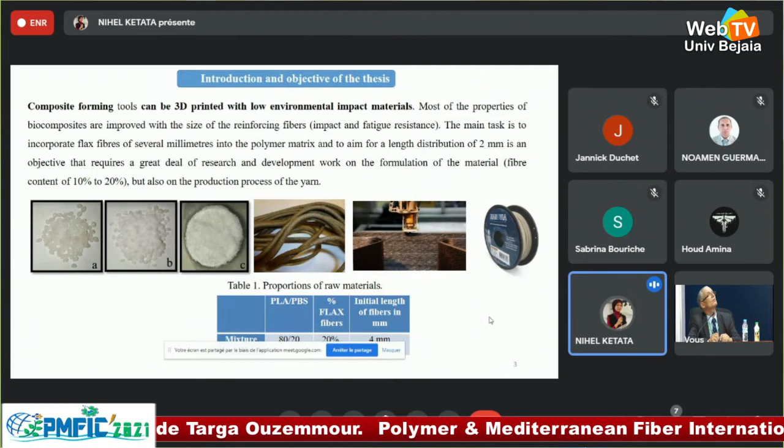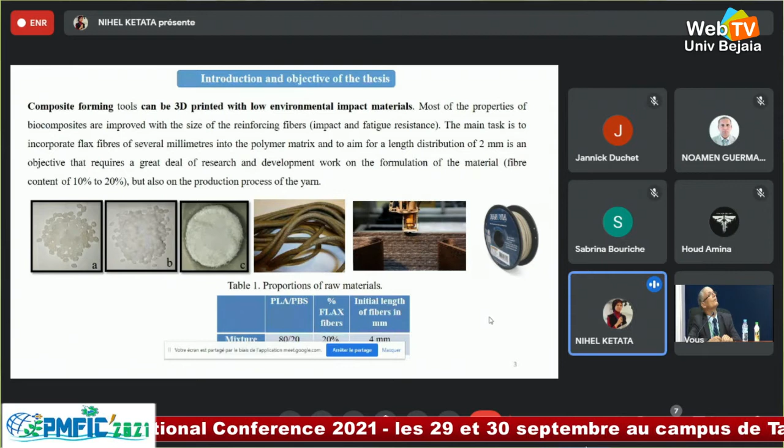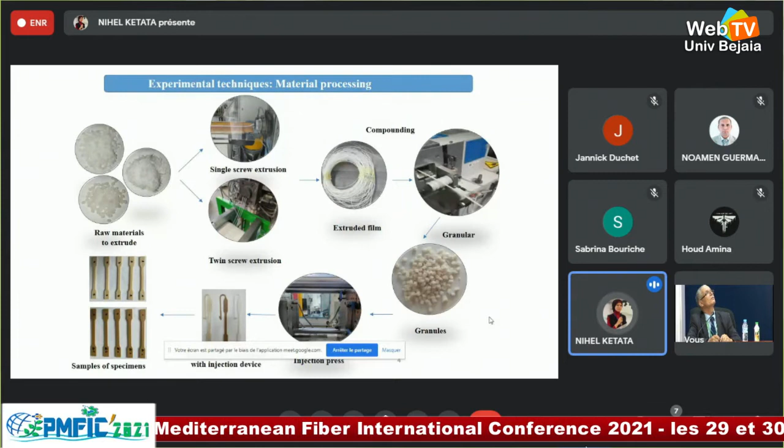So the main work is concentrated on 3D printing materials with low environmental impact using the FDM process. It is a biocomposite from a mixture of 20% PBS and 80% PLA reinforced with about 20% flax fibers. So we manufactured the test specimens using two extrusion methods to compare them in terms of mechanical results and, most importantly, in terms of fiber distribution results.

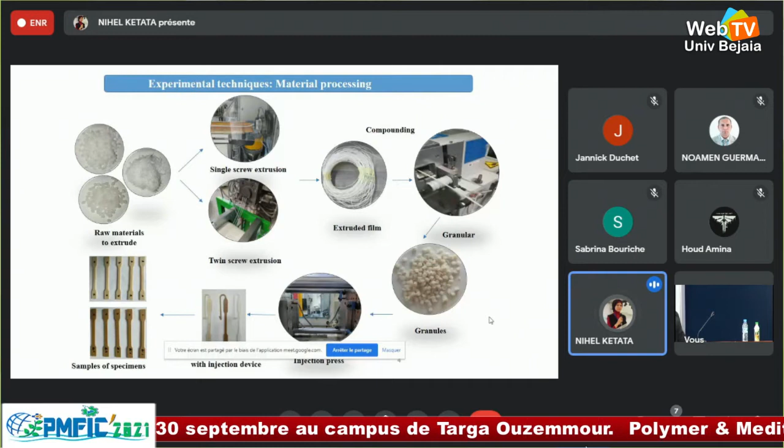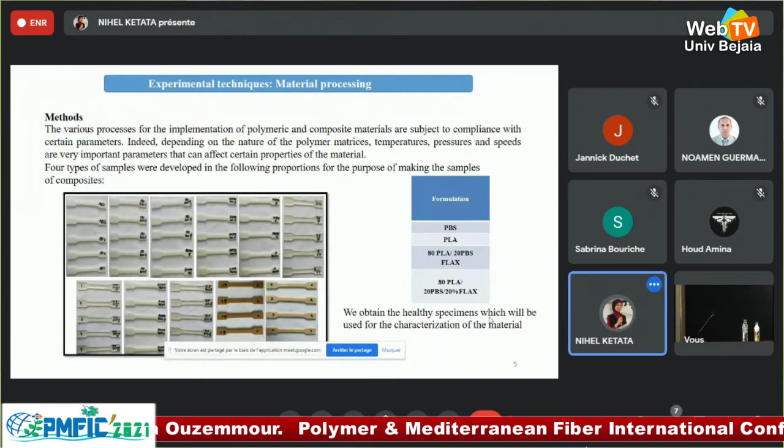So we use the single screw and the twin screw extrusion methods to obtain the extruded films. Then we granulate them to inject the test specimens and finally obtain the specimens which will be used for the characterization of the material. So we made four types of formulation. We test the PBS version, the PLA version, 80% PLA with 20% PBS for the matrix, and 80% PLA with 20% PBS reinforced with 20% flax fibers.

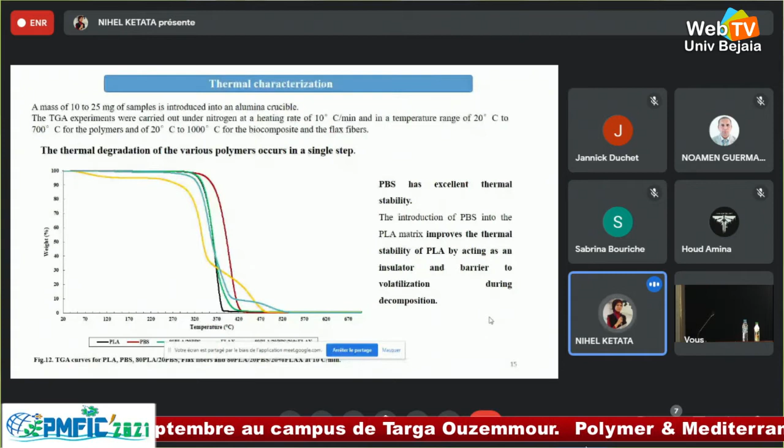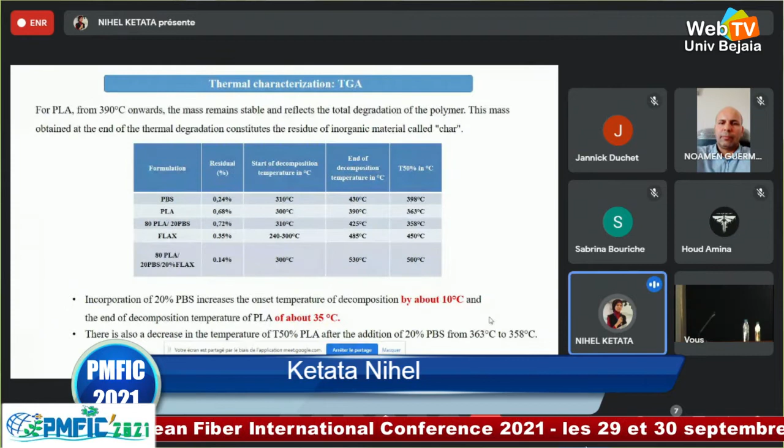Moving now to the thermal characterization. For the four formulations and the flax fiber, the results show that PBS had excellent thermal stability. Also, the introduction of PBS into the PLA matrix improved the thermal stability of the mixture compared to PLA only. Incorporation of 20% of PBS increased the onset temperature of decomposition by about 10°C and the end of decomposition temperature of PLA by about 35°C.

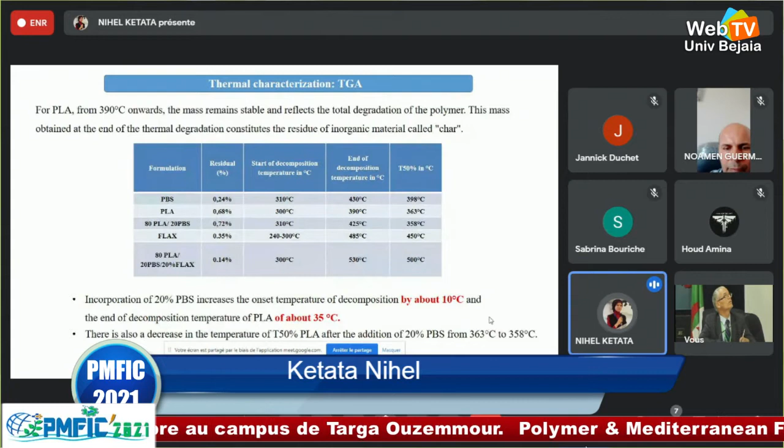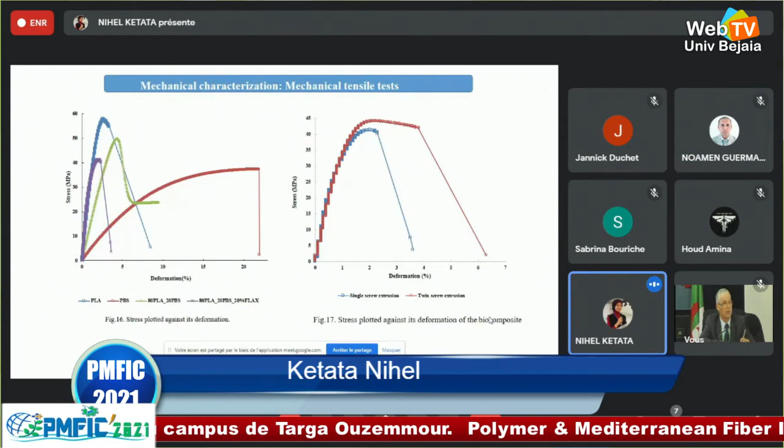Moving now to the mechanical characterization. From the results, we note that PLA has a high modulus of elasticity, high resistance, and great fragility. It also has brittle behavior. This polymer has a linear elastic domain followed by a restricted plastic domain. PBS has good tensile strength also, and is a fairly stiff and flexible polymer at the same time. It also has a low modulus of elasticity, good strength, very high elongation, and high flexibility.

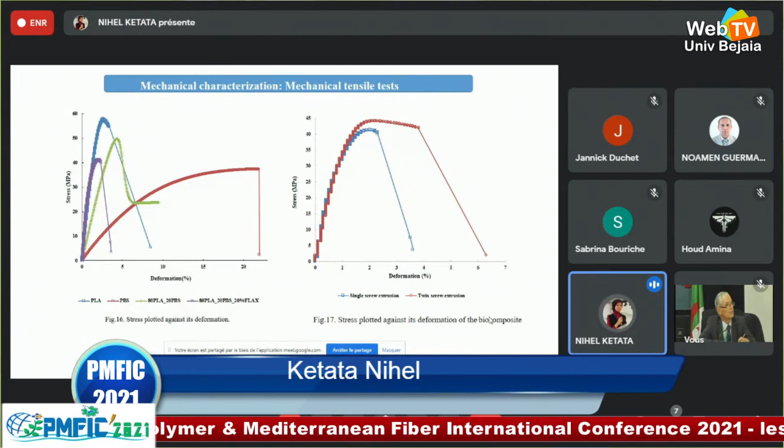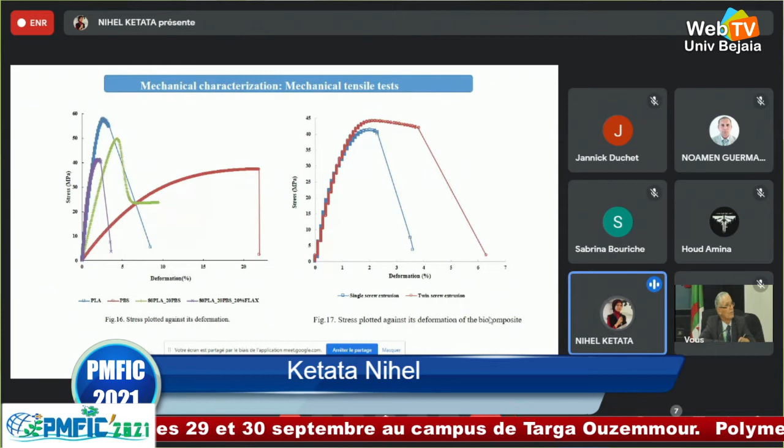The results also show that mixing PLA with PBS provides the desired stiffness of the material and gives us an acceptable modulus of elasticity, good resistance, and elongation at break. PLA provides the desired rigidity of the material, and PBS is responsible for the elongation, reflecting the fact that PBS and PLA are compatible. Finally, the addition of flax fiber leads to an improvement in properties such as the tensile modulus. On the other hand, we observe a decrease in deformation and therefore in the elongation at break.

For the maximum stress, we saw that the tensile stress of the composite is slightly increased in twin-screw extrusion compared to the single one. This is due to the good dispersion of the flax fiber in the matrix compared to single-screw extrusion. The tensile strength of the matrix of 80% PLA and 20% PBS without reinforcement is reduced after extrusion due to the high shear stress in the die.

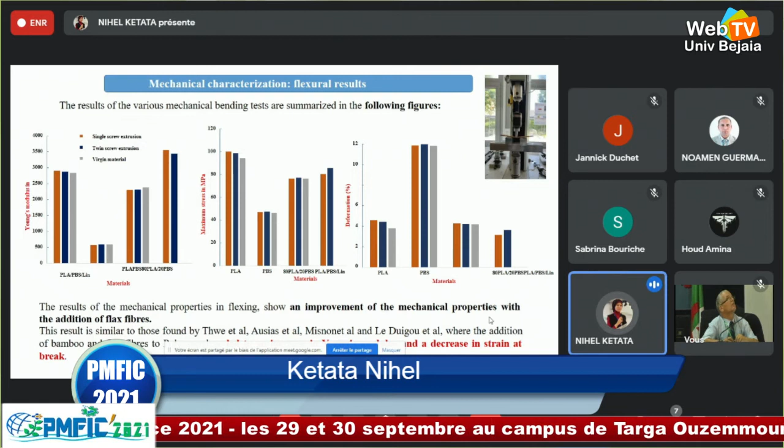So to conclude, we can say that the process, single-screw or twin-screw extrusion, does not have a significant effect on the matrix. On the other hand, it has a slight effect on the composite. For the flexural results, the mechanical properties in flexion show an improvement with the addition of the flax fibers.

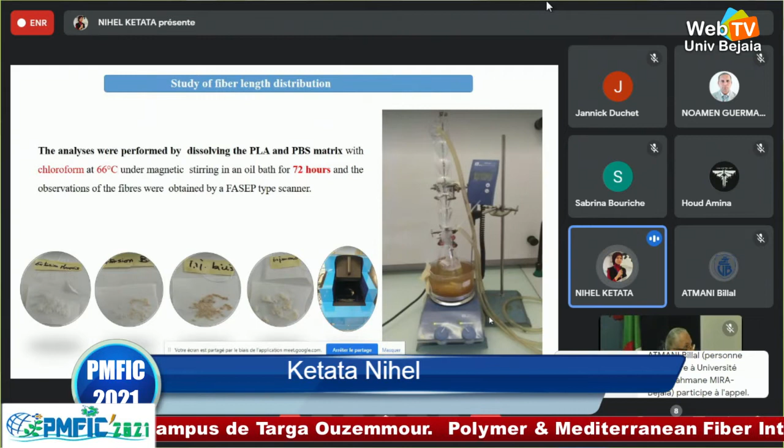Moving now to the study of the fiber length distribution. In the following, we present the analysis of the fiber size distribution after compounding the flax fiber in the matrix by twin-screw extrusion and single-screw extrusion, and after injection of the material presented at the beginning of the section. The analyses were performed by dissolving the matrix in chloroform at 66 under magnetic stirrer in a bath for 72 hours, and the observations of the fibers were obtained by a scanner.

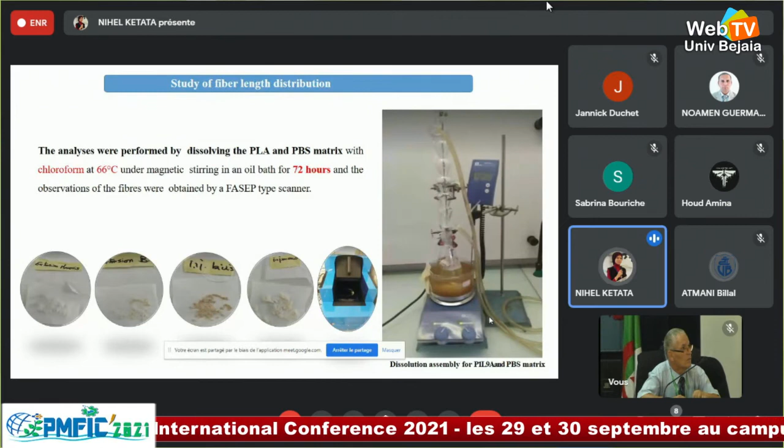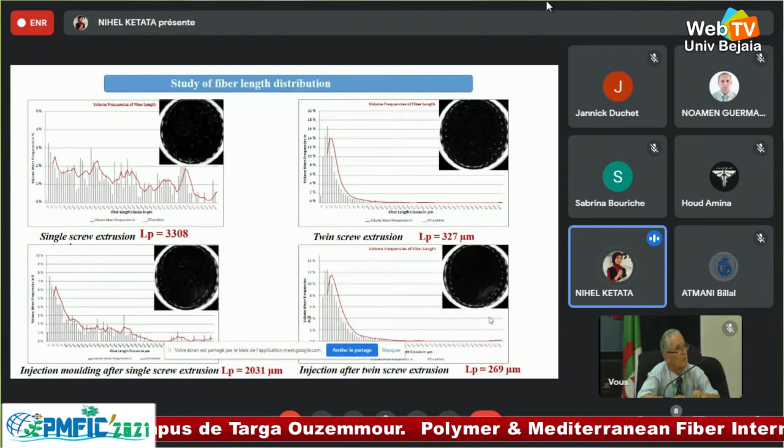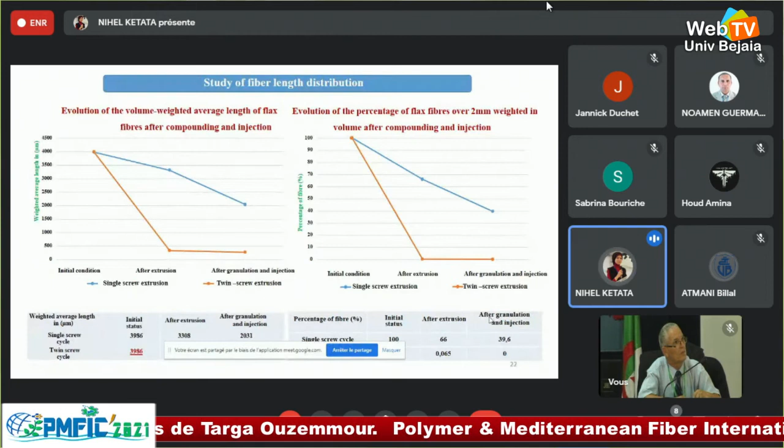The four processes give us different lengths of the fibers. We work on the observations of the fibers obtained by the scanner for the four processes. These studies show a reduction in the average length of the fibers from 4 millimeters to 269 micrometers after the injection of the pellets obtained in the twin-screw extrusion. This effect was mainly associated with the compounding operation and not with the injection operation.

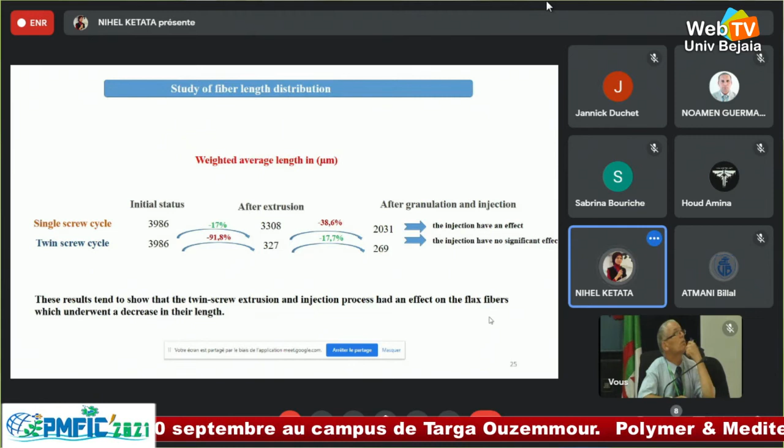This study showed a reduction in the average length, and it's generally observed that the injection results in a reduction in fiber length in all the polymers. These results tend to show that the twin-screw extrusion and the injection process have an effect on the flax fiber, which underwent a decrease in length. The injection has an effect on the fiber length distribution in the samples obtained by single-screw extrusion. On the other hand, for the twin-screw cycle, the injection has no effect.

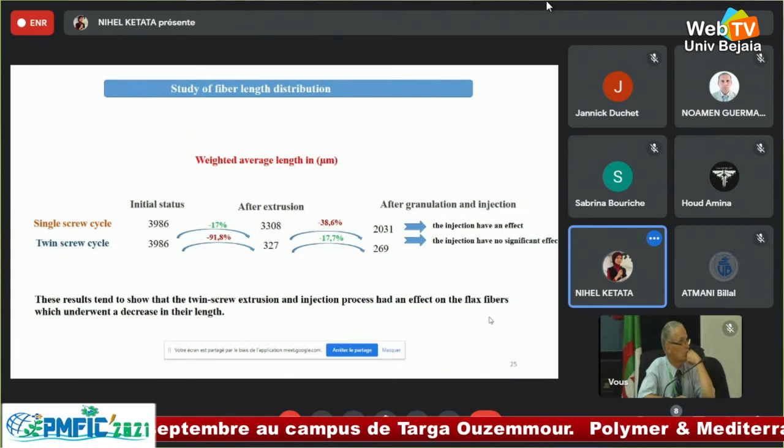So for further work, we will use the single-screw cycle because it has the least effect on the fiber length, to have that effect in the mechanical and fatigue characterization of the materials.

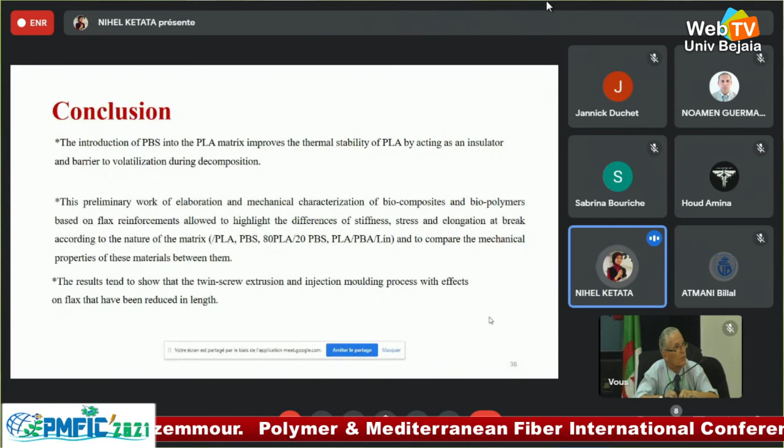For the conclusion, we can say that PBS has a good effect when mixed with PLA for thermal stability. We will work with single-screw extrusion to have a good combination for the 3D printing of our polymers.